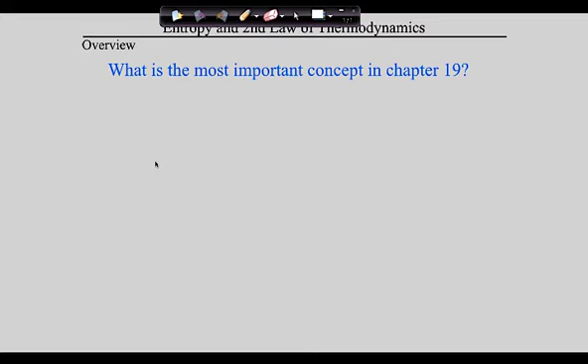Then what we're going to do when we get together Monday is we're going to bring all of this together and talk about how that relates to the most important question in chapter 19, which is when are reactions spontaneous and when are they not? So guys, let me see if I can sort of lay out the field, if you will, for this day. So guys, this is it. The most important concept in chapter 19, and therefore the most important concept in this unit, is spontaneous processes.

Guys, all of this is coming like a symphony towards this crescendo, which is actually spontaneity. Everything that we've been doing with enthalpy and what we'll do with entropy is all building towards spontaneity. So let's talk briefly about what this means. So guys, when we talk about a spontaneous process, what we are talking about is a process that happens without any external intervention.

So guys, what does that mean that a process happens without any external intervention? So as we talk about what that means, what we need to do is talk about some of the fundamental characteristic properties of these spontaneous reactions. So let's talk about these, and I think that this will probably help you pull these ideas together. So again, here's what we know. We know that chapter 19 is rough. And we know that there's a lot of really deep, interesting chemistry coming our way. But guys, we also know that this is all headed in one direction. And this one direction is moving towards identifying what we call spontaneous processes.

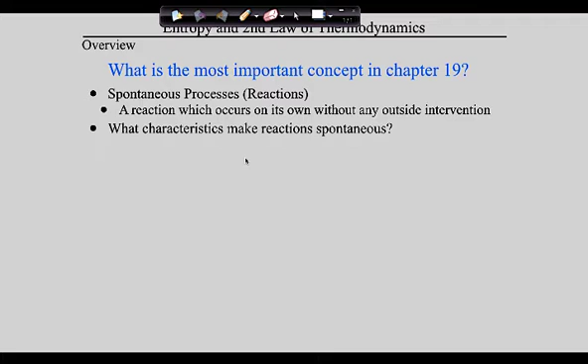And I think you probably picked up from the reading that spontaneous processes are processes that happen without any external intervention. So, what are some of the characteristics that make reactions spontaneous? And guys, it's fundamentally this. Spontaneous processes lose energy to their surroundings.

Now, guys, it's at this point that we need to be sort of careful. So here's what we're saying. We care about reactions or processes that are spontaneous. What does it mean to be spontaneous? It means it happens on its own. So what is it that makes reactions spontaneous? They happen on their own. Well, guys, the answer is spontaneous processes lose energy to their surroundings. So, guys, you ready? Tie this back to chapter 5. Does that mean that they're endo or exothermic? They are exothermic.

But guys, the thing that makes this interesting is many times we don't think of these as being heat-releasing processes. But guys, let's tie this back to our, ouch, hurting me. Okay, let's tie this back to our metal block. Okay, so the idea is this, and I'm going to use this as a bumper. I'll use my book.

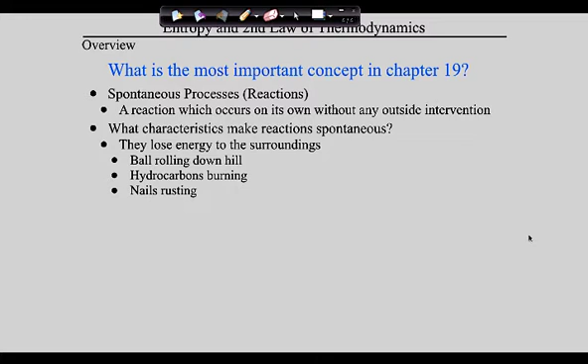It is spontaneous. Now, is it endo or exothermic? It's endothermic. How do we know? Because it's getting cold. Do you see the problem? We now have an endothermic process that does not lose energy. Guys, we now have a spontaneous process that doesn't lose energy. And that violates everything that we just talked about related to spontaneity.

Because we understand that balls roll downhill. Why? They're giving off energy. We understand butane burns. Why? It's giving off energy. We understand that nails rust. Why? They're giving off energy. Well, guys, guess what? Ammonium nitrate dissolves in water. Why? It's not giving off heat energy. So, guys, what's going on? Guess what? I'm not going to tell you.

But guys, I will tell you this, and you can write it down if you like. Quick cold packs are an exception to this rule. So if you don't understand why this is an exception, I've written it out for you in sentence form. The idea is this. Energy must be lost to the surroundings in order for a reaction to be spontaneous. That is true. But if that is true, what explains what we're experiencing with a quick cold pack? And guys, the answer is simply this. Our definition of energy is too narrow.

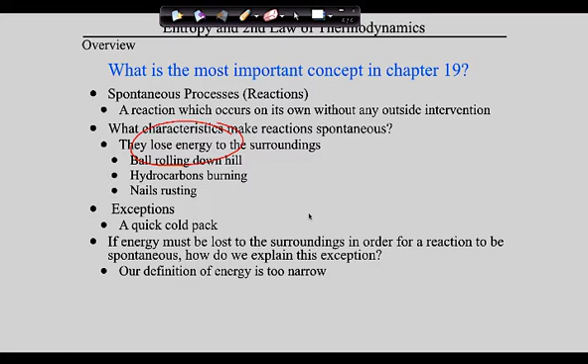All right. So guys, this is the way we're going to wrap up today. A little bit of terminology. These are some terms that you were talking about at the beginning of the day. Term number 1 is a reversible process. In order for these next couple terms to make sense to you, you have got to weed out of your brain right now the idea of spontaneous. So don't try to connect these terms to spontaneous until I take you there. Reversible process.

Guys, a reversible process is a process that can return to its original conditions, its original state, with no change in the system or the surroundings. So guys, don't think about it too much, just let it sit on its own. So a reversible process is a process that can go from where it went back to where it started with no net change in the system and the surroundings.

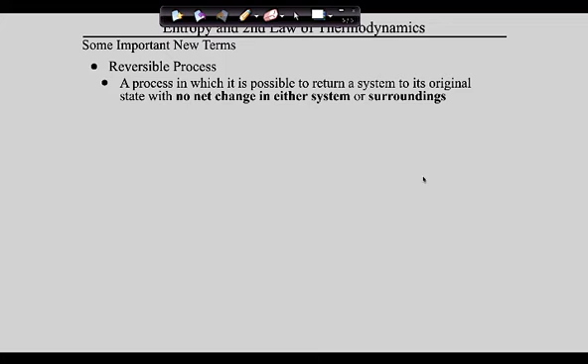So guys, allow me to just hijack from the book the example that they use, because it's helpful for me to think about at least what could be a practical example. So the book gives you this example: a glass of ice water at 0 degrees Celsius. Here's the thing, chances are good you've never seen this. So you may want to draw it with me. You've got a glass, and let's just put one ice cube in the middle. So you've got a glass of ice water.

So you ready? What if you were to take this glass of ice water and set it right here on the table? What's going to happen? The ice is going to melt. What happens if you put it in the freezer? It's going to freeze. But what would happen if you put it in an environment where the temperature was exactly 0 Celsius? And do you understand that in your freezer the temperatures are sub-zero? So would it melt or would it freeze? Yes. It would do both.

Check this out. Imagine that this is a water molecule. Does that water molecule have more or less energy than the molecules in the ice cube? I'll switch colors here. We'll go red. Okay, so the black ball is a liquid water molecule. The red ball is an ice molecule. Which one has more energy? The liquid one, because it's broken the lattice apart and escaped from the lattice of the ice.

Now guys, here's what happens. These water molecules are moving around, right? So when this water molecule crashes into the surface of the ice, what does it do? Loses energy to the ice. And as it loses energy, it freezes and sticks to the surface of the ice. But where does that energy go? Into a molecule on the surface of the ice, and that molecule gains the energy, comes off and melts. So for every molecule that freezes, a molecule melts, and consequently there's no net change. Remember, no net change in the system and the surroundings, which by definition is a reversible process.

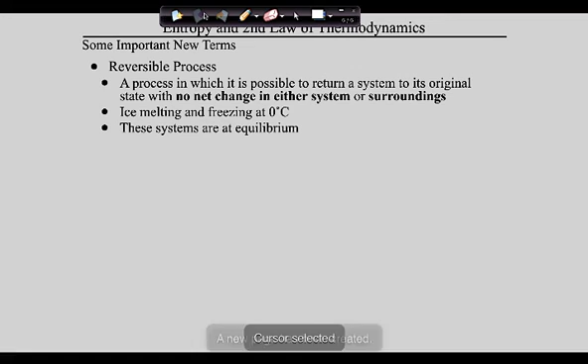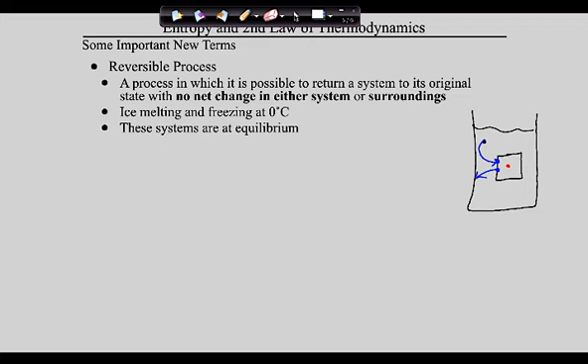I fear to go there because there's a lot of other forces at play there. You know that eventually that'll stop, right? So I'd hate to go there. So guys, these are then at equilibrium. Does that make sense? No, not at 0 Celsius. Good on you. Did you hear Uriah's point? He said, wouldn't that stop too? And the answer is no. At 0 Celsius, not only would it never stop, but as Matt said, we would never notice a change, because the number of molecules in the ice and in the liquid water would never change because they're always exchanging perfectly. Does that make sense?

All right, guys, so now let's look. Go ahead. Well, that's a whole other class of chemistry because you're actually talking about the way crystals form. And the answer would probably be no, because sometimes when you make ice, it's very clear and translucent, and sometimes it's cloudy. The reason is the order in which the molecules froze when the ice formed. So it might look a little different because of the efficiency of the crystal formation. So technically, it may not look exactly the same.

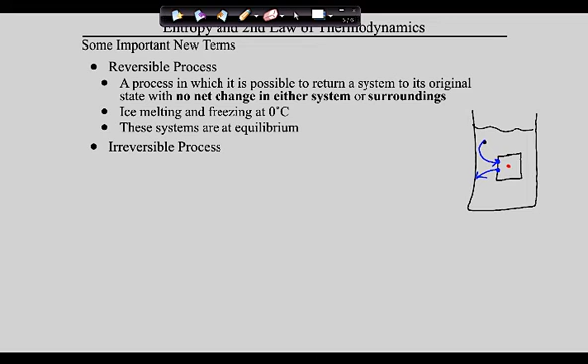So guys, now let's talk about irreversible processes. Unlike reversible processes, irreversible processes cannot simply be undone by reversing the events that caused them. Now, guys, don't be confused. Irreversible processes can't be undone by simply doing the opposite of what did them, like melting and freezing, right? When one melts, the other freezes. When one freezes, the other melts. They're just undoing each other.

Guys, an irreversible process is not like melting and freezing. The process cannot be undone by doing the reverse process. But that does not mean it can't go backwards. It can go backwards. It just has to go backwards through a different path. And that different path has different amounts of heat and work associated with it. Okay.

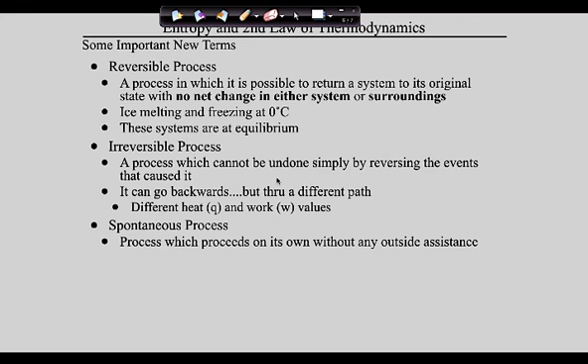Okay, so guys, coming back then to our big idea, we understand reversible and irreversible. What does it have to do with spontaneity? Here it is, guys. You don't need to write this first one down. You already know this. Spontaneous processes are processes that happen without any outside assistance. This is then the connection. Spontaneous processes always happen in what we call the spontaneous direction. Why? Because they're irreversible.

Spontaneous processes are irreversible. So spontaneous processes have a direction that we call the spontaneous direction, and a direction we call the non-spontaneous direction. The spontaneous direction is the one that we see happen because it's the one that releases energy. And we'll explain how that's still the case with the quick cold pack next time. Yeah. Equilibrium can be thought of as being spontaneous in both directions simultaneously. Exactly, it's going both directions at once.

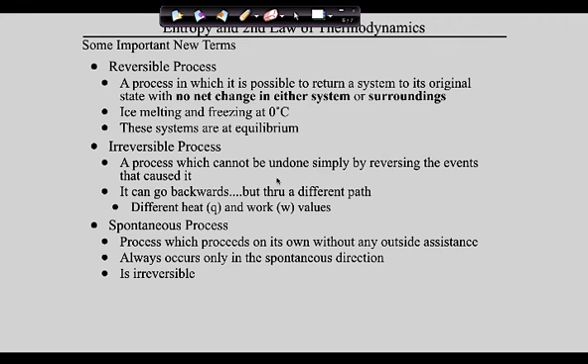Yeah. Okay. So guys, really quickly, let's go over pride reports. Tyler, you are going to stay. Oh wait, hold on. Sorry. I shouldn't record this.